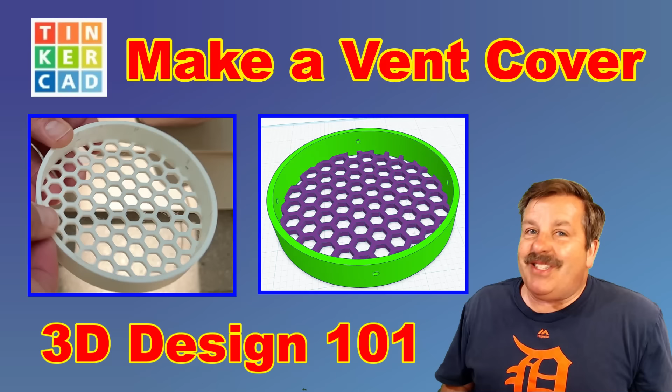Today, friends, we're going to make a 3D printable 4-inch grate using Tinkercad. So let's get cracking. Here's the issue: critters could get up in this area, so I am going to create a grate that keeps it locked.

Of course, step one is to measure it. This is upside down and hard to see, so I'm just going to show you. It's 4 inches. I always work in metrics, but because this thing is actually 4 inches, we are going to work in inches. If you've got a caliper, you could switch it to inches as well, and measure the inside if you wanted to build it there. Notice it's 3.52. If we go to the outside measurements, we get that same 4, or 3.98, depending on how accurate it is. My goal is to make this a tiny bit loose so it just slides on, and then I'm going to have a couple of screws so we can set it in place.

If this is your first time visiting Tinkercad, you can get there at tinkercad.com. I like to choose Sign In with Google. This is the basic workspace. These are our 3D designs. They are all stored on the cloud, and they are all private until you choose to make them public.

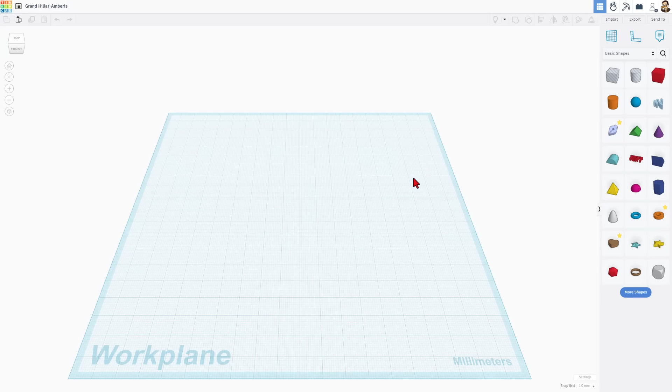Over here is the Create button, and today we are going to create a brand new 3D design. I like to start by naming projects. This is going to be called 4-inch grate. You can, of course, put whatever name you want. Once you click down there, you can click back to the Tinkercad dashboard, and this is how your project is immediately saved. After a moment, the projects get a little image so you can see what they are. Right now, I'm going to click on Tinker This to return to the project.

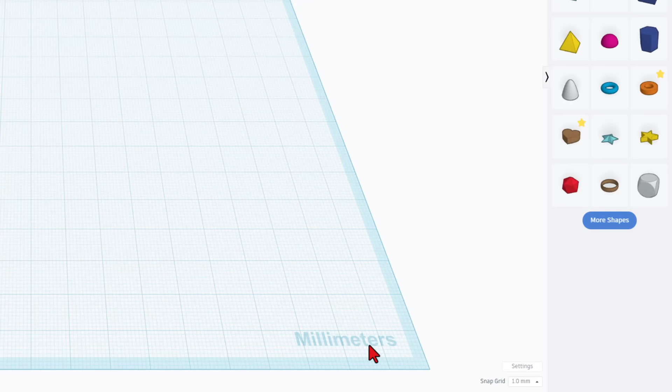The first thing I want to talk about is that Tinkercad normally works in millimeters, so do 3D printers, so I love millimeters. But for this project, just because that part was in inches, I'm going to switch to Imperial, and I'm going to use inches. I'm also going to use a scale of 1:1 because that will fit in this work area. Notice it is almost 8 inches, so it's easy to do my project, which was 4 inches. I'm going to click out here to back out.

We're going to start this project with a fantastic part called the tube. When we bring this out, notice I set it at center. I was just watching that little line right there. It is not essential to do that, but it does kind of look nice as you build.

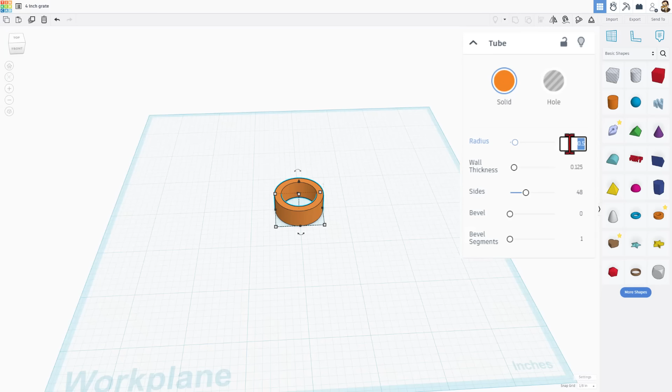Now we're going to change measurements over here with the radius. Remember, our project was 4 inches, so I could type 2 and get exactly 4 inches. Notice if we click this, it'll show us that 4-inch measurement, but I want it to be a little larger because that was the outside measurement, and I need these walls to have some thickness. So I'm going to type 2.125. Notice that gives me a 4 1/4 measurement. If you simply double the math, that's how much that equals.

Now to make the fit more like I want, instead of 0.125, I'm going to do 0.12, so that makes it a little thinner. I do believe it's going to be outside it just a little bit. I'm going to bump the sides up to 128 so the part is more smooth. Lastly, I'm going to skip the bevel. I will show you the bevel. If we do 2, notice it rounds it. If we change this to 10, notice it only rounds the upper parts. I don't want that, so I'm going to just leave it at 0.

That's how I want to build this part. I'm also going to take the height, and I'm going to raise it up to 3/4 of an inch. Notice you can do that with this 1/8 nudge super simply.

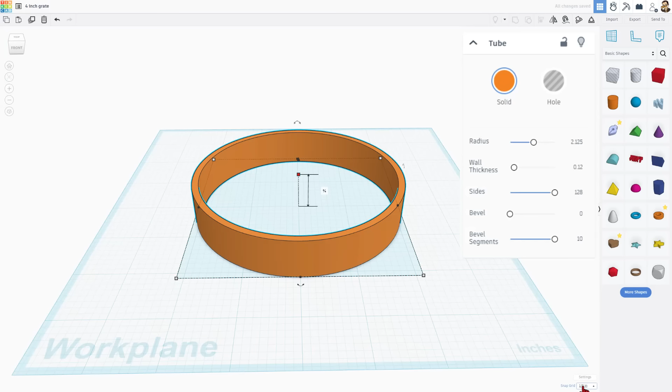Now let's move on to the Honeycomb Grid. This is my favorite part. We're going to search for the grids. If you type grid and press enter, there are several to pick from. You can play with all the different ones. I'm going to play with the Honeycomb Grid.

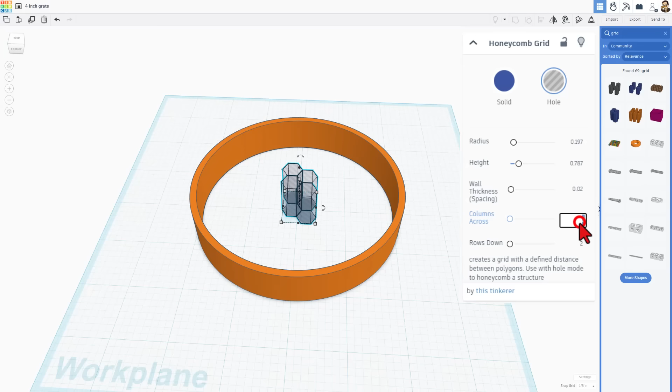When I bring it out here, of course, the first thing I'm going to do is make it a hole. I'm going to keep this radius of 0.197. I think that looks pretty awesome. I'm going to just quickly change this to 12 by 12, so that way we're sure that it'll cover the entire part.

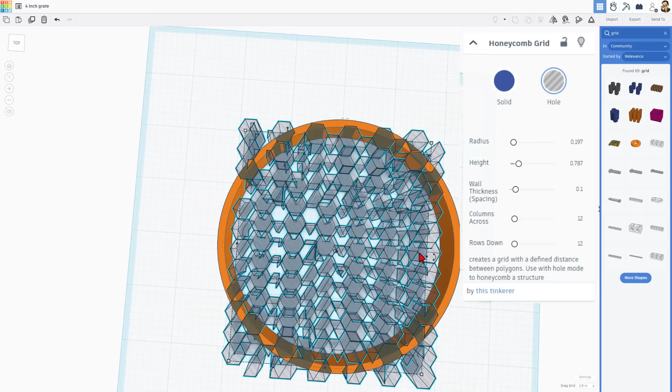I am going to make this gap more. You'll notice that this would not be a very thick wall for the part that we're going to do. I'm going to change it to 0.1 so there's more space in between it. Notice that version looks a little bit jacked up. I'm going to simply type this again, 0.1, and press enter. That's the one that I wanted to have. It'll look even more clear if I switch to a flat view and a top view. Now we've got an excellent view of how that honeycomb grid is.

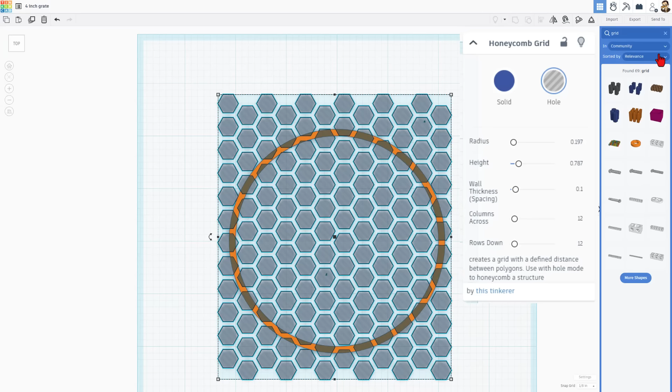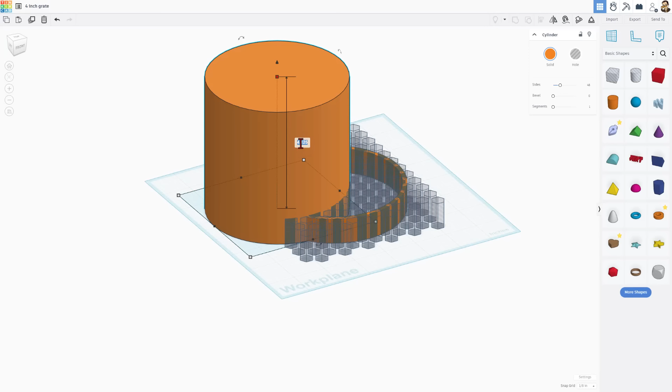Now we need to cut it out of another part. That is simply going to be a cylinder. We're going to bring that cylinder out. I'm going to leave the sides at 48 because it's going to be inside the shape. I'm simply going to shift stretch this, but instead of 4 inches, I want 4 1/8. You do want to note that it is 4 1/8 inches high. I instead want to make that 1/8 of an inch, so I'm going to type 0.125 and press enter.

Now we're going to use the awesome lock feature. I want to make sure I've got the orange tube, and I'm going to lock it. Then I'm going to grab all the parts, choose L to align. I'm going to make that tube the boss. Click center and center so that it's all aligned.

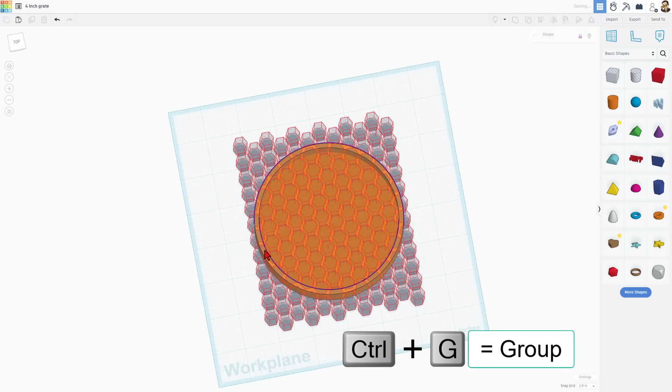Now this is what's so amazing. When I do Control G to group this, the locked part does not get grouped. I'm going to turn the perspective back on so you can see it. And all of a sudden, we have got a fantastic honeycomb grid that we can use for our part.

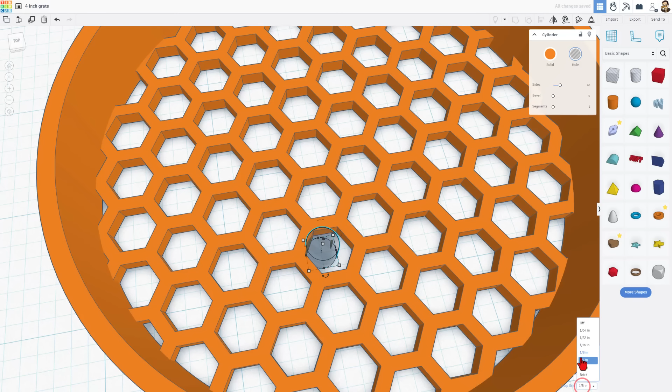Now, do notice there's one little artifact here. We are going to get rid of that by simply bringing out a hole cylinder. I'm going to shrink it down to a small size, and let's move it into place. Get it aligned with our nudge. Notice this is where we can change the nudge to smaller numbers. I'm going to go to 1/64.

Now I am sure I am cutting that part out. And once again, I'm going to select the 2 shapes and do Control G to group. All right, so I have found that the holes I want in this, I'm going to do 1/8 inch holes.

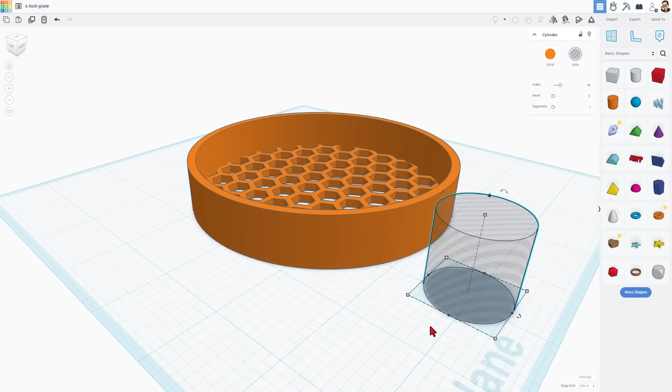I'm going to bring out a cylinder hole, and these 1/8 inch holes actually work with 3mm machine threads that we use for 3D printing. So I'm going to click on this and just shift stretch it in. And of course, I'm going to type 0.125 to get that 1/8 measurement we want. Of course, I'll make it a little bit longer.

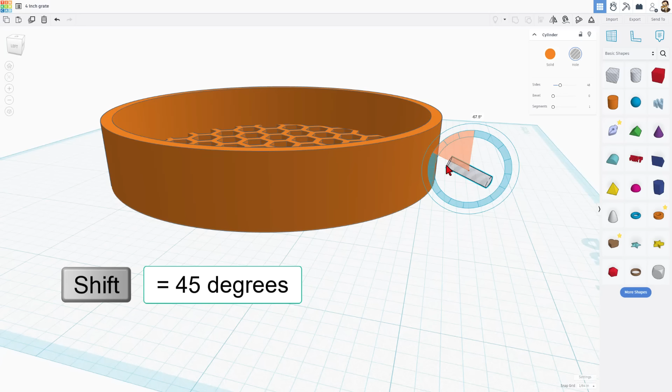All right, so to line this up, of course, I need to rotate it 90 degrees. Don't forget when you rotate, if you stay inside the blue circle, it's 22.5 degrees per click. Of course, if you hold down Shift, it's 45 degrees per click. Let's line this guy up.

I'm going to do Shift Select and L. Click on this one to make it the boss, and I want to line it up this way. I'm also going to line it up with the top, and then I'm going to nudge it down, but switch to the 1/4 inch nudge. That way I only have to click one time to nudge it down 1/4 of the way.

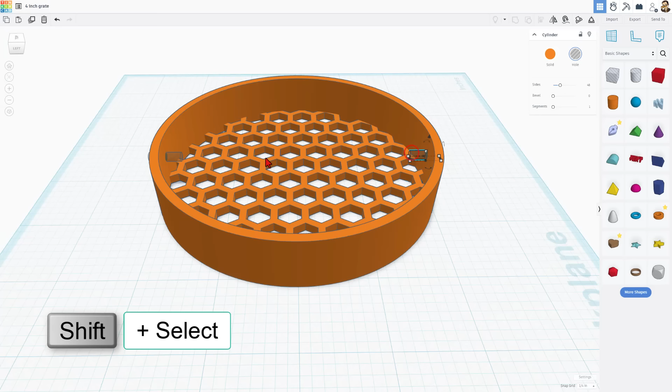I can also use the arrow keys to move it so that I'm sure it's cutting. Notice it's on both sides. I also want this on this side, so I'm going to do Control D and nudge it over there as well. Now, since I've got those both selected, I want to let you know I've clicked somewhere else to cancel that duplicate. Then if we Shift Select these two and do Control D, we can rotate those 90 degrees, and bingo, we have got matching pegs on every side.

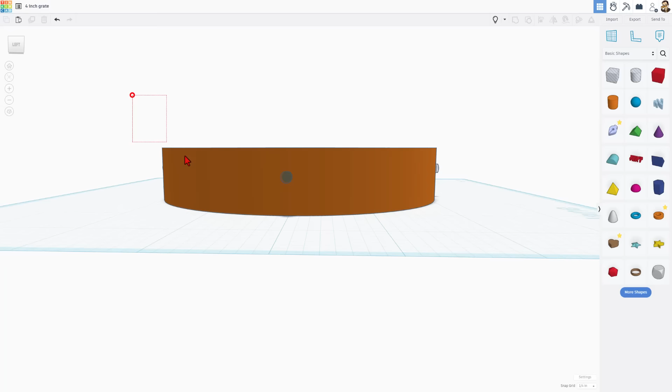With them all aligned, let's unlock this shape. I'm going to look at it from the left. I'm not going to grab the grate down below. As a matter of fact, I'm even going to hide it so I cannot select it. Let's grab all of those and do Control G to group. Bingo, the holes are cut. Now we can show the shape.

I'm going to grab it all, and let's do Export. I'm only going to do the selected 2 shapes, STL. I'm going to put it in my 3D modeling folder, and I'm going to call it 4-inch grate, and hit save.

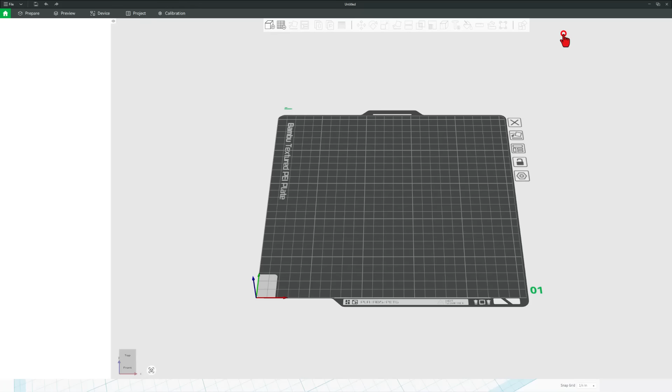Of course, now let's bounce to Bambu Lab Studio, hit create, brand new 3D project. I'm going to be using the Bambu Labs P1S. I'm going to print this in draft because I really do not need a high quality print. I just want it to last a while.

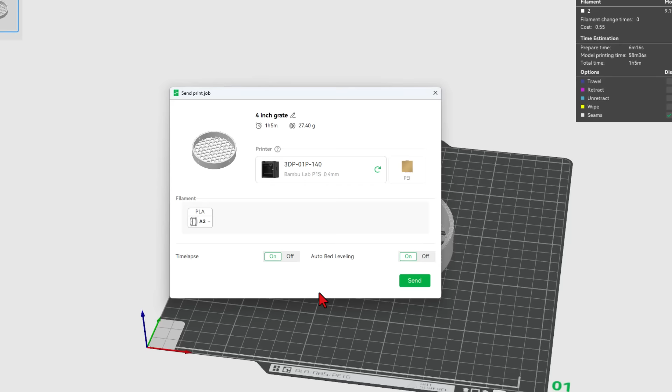Let's hit add, find our part. I'm going to pick a color, change mine to a generic PLA for this print. Let's slice the plate. Check it out. It's going to take 1 hour and 5 minutes. Let's hit print, and of course, send it to the 3D printer.

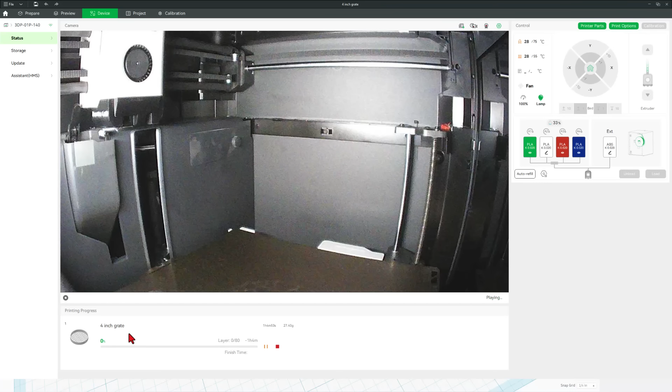After a moment, of course, it bounces to the device menu. If you want to explore different materials like PETG to see if it'll last longer, you can. And of course, I'd love to hear the results you have with yours. And of course, once that downloading completes, we can hit play and monitor everything from afar.

And after 1 hour of printing, check it out. Awesome honeycomb grid. We've got the screws ready that actually fit that Imperial measurement perfect. This slides on so nice and snug. We technically probably do not have to tighten it on, but I've got these screws, so we're going to just lock it in place. How cool is that?

Just a few minutes of designing in Tinkercad, and bingo, problem solved. Friends, once again, simple steps to build with Tinkercad.